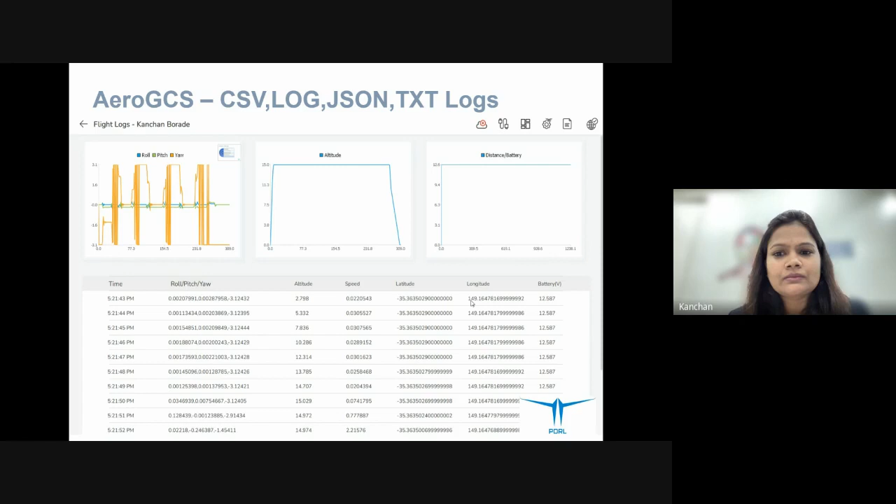Yeah. So, as we have seen, CSV, TXT, .log, and JSON. Those formats are readable formats, and they are very easy to represent in graphical format. Those are very easy to decode. Whereas binary logs must be decoded before they can be analyzed; those are very difficult to analyze as binary. When I say binary, those are in machine readable format.

So firstly, let's understand what binary logs are. The drone's binary logs are often referred to as a black box, or the flight logs, which is a file that records a variety of data related to the drone's flight performance. And again, as I said, those are recorded in machine readable format, that is in zeros and ones.

The content of a drone's binary log can vary depending on the manufacturer, the type of the drone, and the features it offers. However, the typical information that might be found in a binary log includes the flight telemetry, sensor data, remote control data, all kinds of system events and error and warning messages, motor and servo data, GPS communication data, and flight mode transmission data. So all kinds of data are recorded inside the binary file. That's why it is very important to decode it and analyze it.

So this is the option to select the binary file. Let me select any file. So yes, I have selected one binary file related to a spraying mission, which was done with the help of AeroGCS. Here, as I said, you can see the flight modes, that is loiter, guided. All the information will be represented in graphical format on the screen. All the status text messages, errors and warnings will be given.

On the right-hand side, you can see a number of parameters. Whatever you want to analyze, you can select accordingly. Let's see, I want to see how the altitude was. What was the altitude performance in my mission? So I'll just go under the barometer and select the altitude from the barometer. So yes, this is how the altitude performance was. Here the graphical information is represented for the altitude.

Same if I want to compare the altitude of the barometer and the altitude given by the GPS. So yes, you can see the difference. We have differentiated the two graphs using two different colors. So yes, this is the beauty of this log analyzer.

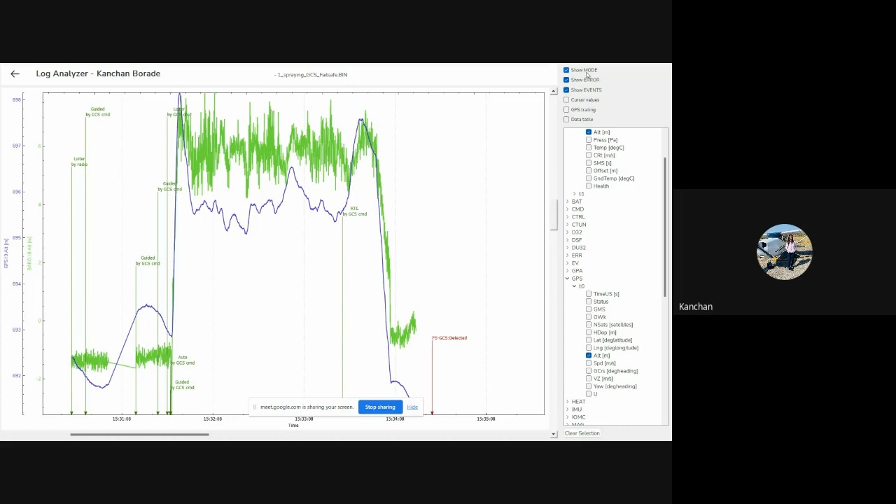Here on the upper side, you can see multiple options. There is an option if you want to see the mode continuously, you can check it or uncheck it. Same for the errors. Then if you want to see the events, all the events that happened at the time of flight, you can see that.

Then the cursor value: if I select the cursor value, I'll be able to see the actual value on the graph, what the value of the barometer and the GPS was at what time. So once I enable the cursor value, I'll be able to see the values on the graph. Then I have a data table. All the parameters are given in the data table. The value of a particular parameter can be seen under this table. We have even provided the table filter.

Once you click on the table filter, you'll be able to see four options, where if you want to deselect all, you just need to click on invert select. Now I just want to see the value of the barometer, what the value of altitude under the barometer was. I'll just accept it, and accordingly those values will get filtered. So this is how the table filter works.

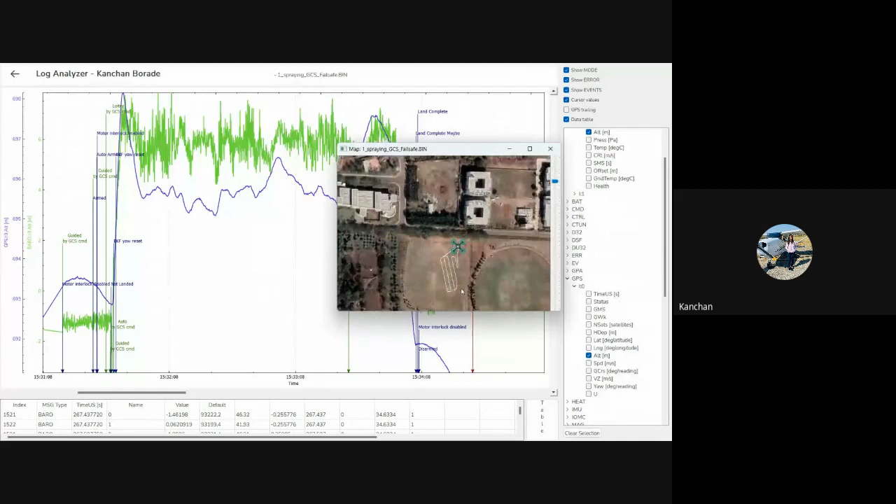I even have GPS tracing, where I'll be able to see what plan was given by the user, how my drone flew on the ground, and what the actual path was. So yes, that can be seen under the GPS tracing.

So this is the basic introduction of this log analyzer. We're going to see a number of case studies, how to use this log analyzer to analyze multiple binary files. I have created 8 different situations. I have 8 different situation binary files where you will be able to see the graph, and I'll tell you how to read those graphs using which parameters.

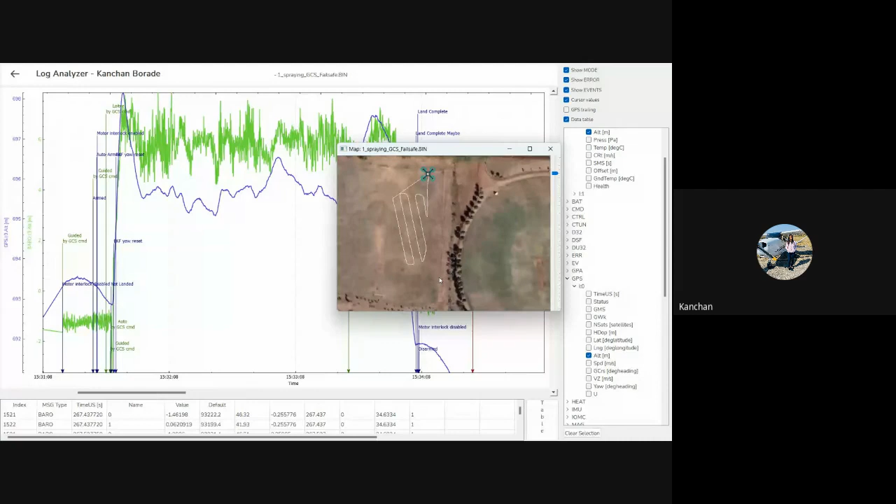Okay, so let's start with case one. I have already selected the file, that is the spraying GCS failsafe binary file for case one. So yes, let's start with that. So this is the spraying mission which we did on the ground. So we just need to see if everything went well or not. So how to see that?

As I told you, as we have seen, we have selected the altitude of the barometer, and we can compare it with the altitude of the GPS. So yes, if you want to check the altitudes, you can select the barometer altitude and at the same time the GPS altitude. You can compare those altitudes. You can even see when the auto command was given, when the actual mission was started.

Now here you can see the value of the altitude. It was 0 initially. When loiter mode was given by the GCS, it was still 0. Now you can see guided mode is given by the GCS, and then auto mode is given by the GCS. Still it was 0. Then it started climbing up, and it was achieving the altitude given by the GCS in the mission plan. And this is how the altitude was achieved, and it followed all the altitude which was given by the mission, or by the GCS.

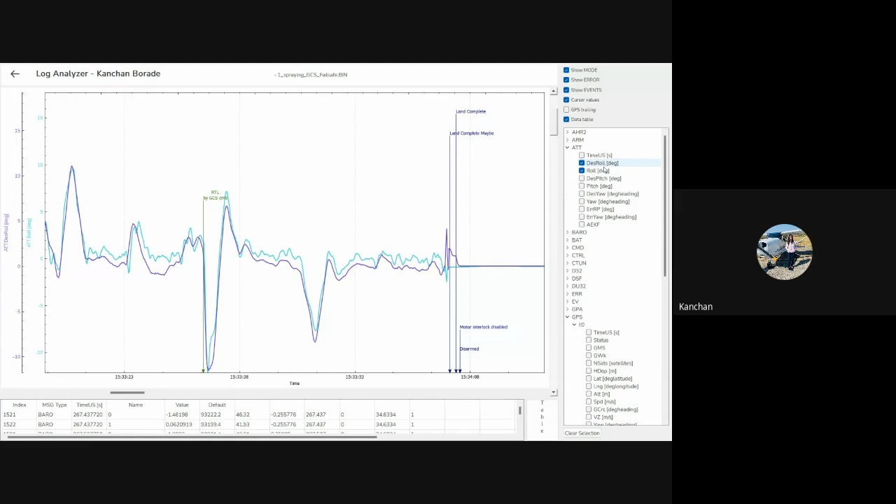But if I want to see the attitude, the actual behavior of the attitude, I'll go to the attitude section. I'll see the roll and what was the desired roll. So again, I can compare the roll which was followed by the drone and what the desired value of the roll should be. So you can select these 2 parameters, desired roll and actual roll, under the attitude section, ATT. Same for the desired pitch and the actual pitch.

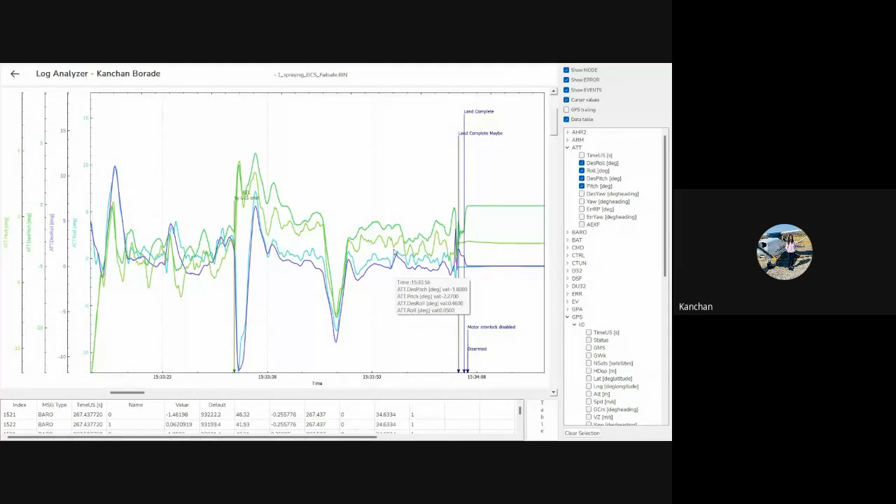As I said, we have differentiated all the parameters with distinct colors. So here you can easily compare the value of the desired roll and desired pitch with the actual pitch. And again, we have the desired yaw and the actual yaw. So we should have this prior information before analyzing the behavior of the drone.

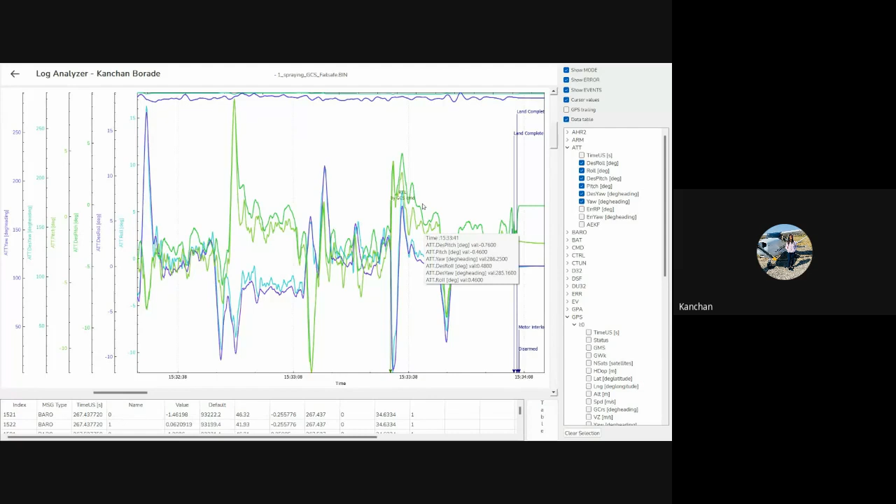So yes, we should know the range of roll, which lies between -90 to 90. Then the value of pitch should be between -180 to +180. And the value of yaw, you must know, should be between 0 to 360. So accordingly, you can read those values. On the y-axis, we have multiple y-axes for the multiple parameters, while the x-axis is constant because on the x-axis we are showing the time. Okay, so accordingly you can analyze the value here.

Now what should be the conclusion? Let's stick to only one parameter, desired roll and actual roll. So here you can see the blue color is showing the desired roll, which is quite a good graph. But you can see the actual roll, which is followed by the drone, is fluctuating. It is fluctuating. But yes, this is acceptable.

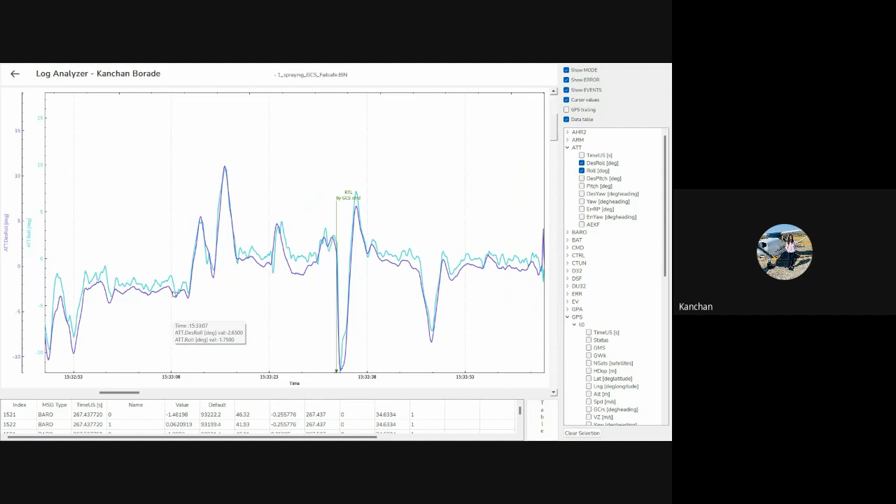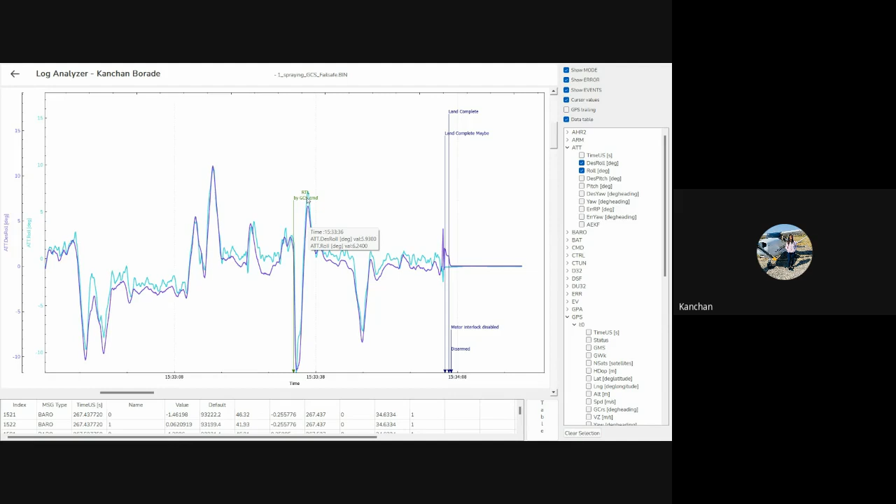So here, if you see the value on the cursor, the desired roll was 5.9, and the actual roll, which was followed by the drone, was 6.2. So yes, this value is acceptable. Okay, so I can conclude, yes, this flight went well for the spraying mission.

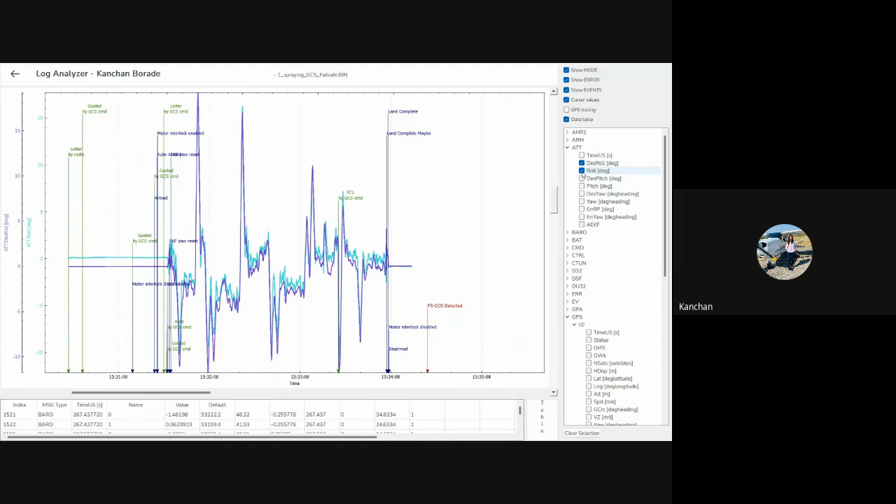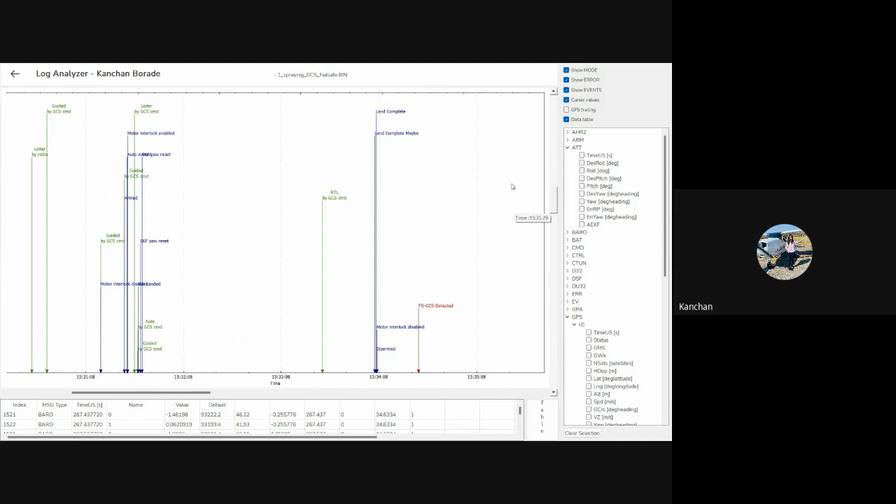Okay, so this was my case number 1. Let's move further for the case 2, where I have a scenario for the motor and the ESC fail. So firstly, I'll select the file which is with me for the motor and the ESC fail. Now, how to analyze it?

Before I conclude, or before I'm saying that this file is motor and ESC fail, many of the users must not be knowing what could be the issue or what could have happened. So before commenting anything, I have just selected the file. Let me tell you the scenario behind this.

So when I say there was no throttle response and it was unable to keep its level, yes, I can go for the motor parameter in this case. So I know which channels were used. That was C11, 12, 13, and 14. So these are the motor performance.

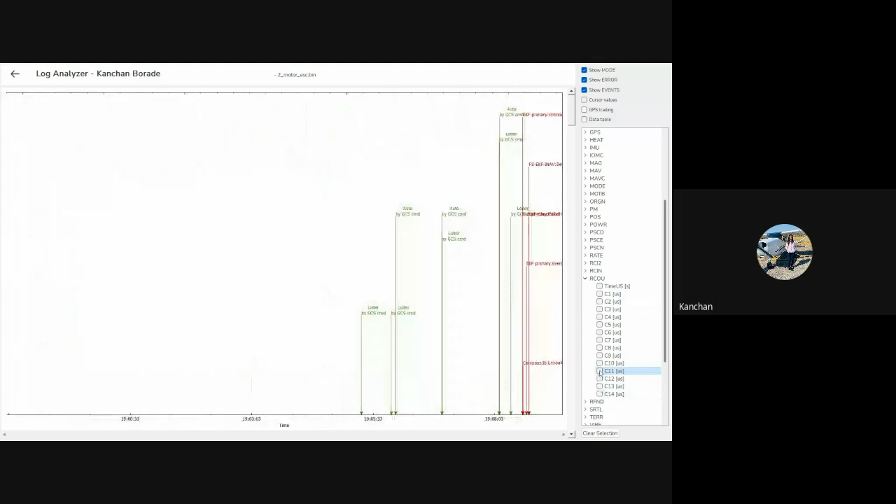So before selecting, as I said, it flew well initially. These are the commands given by the GCS: loiter, loiter, and then auto. It flew well. It was flying in auto mode till this, but suddenly it got some messages like compass was unhealthy at that time. It failed to initialize, and that got fail-safe detected because of the bad variance.

So let's have the motor selection: C11, 12, 13, and 14. Generally, the value of motors or value of PWM which are configured should lie between 1000 to 2000. As there was no message from the flight controller when it was falling, as I said, there was no throttle response. So let's see what was the battery voltage at that time.

So you should go to the battery, BAT, and need to select the battery voltage. So I found this okay. You can see the graph. This is quite good. So I don't think the battery is problematic. There was no EKF variance found.

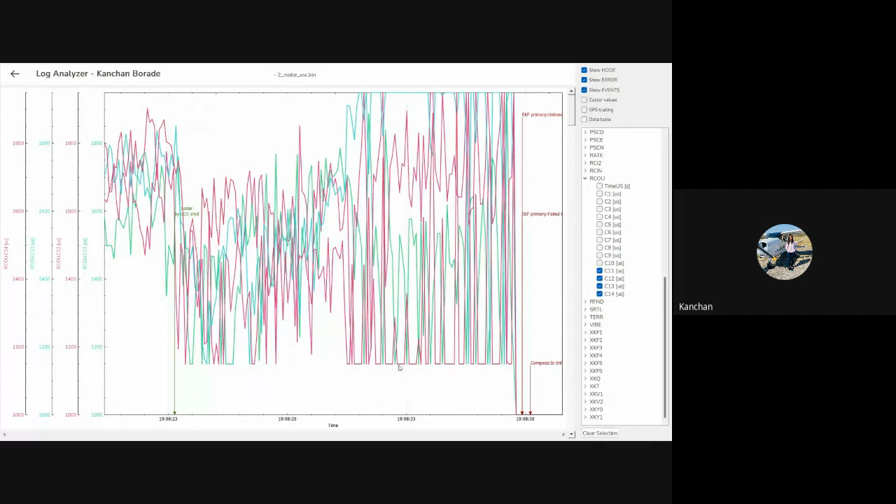13. See here, you can see the values of the motors are touching their minimum value. C12 is going below 1200, so that could be around 1100 or more than that. So they are touching their minimum value. Here you can see those are actually performing well because those values were between almost 1400 to 1800.

So here, as I said, initially the flight went well, but then suddenly it started losing its altitude because these values are touching their minimum value. So that's what we can conclude here: if those values are touching their minimum value, something must have gone wrong with the motors.

As we have discussed the various parameters for this file, let's summarize it one by one. We have checked the vibration values, those were okay. We have checked the battery voltages, that was also okay, because as I said, during the flight the drone caught fire, so it burned. So that wasn't because of high vibration, that wasn't because of the battery voltage.

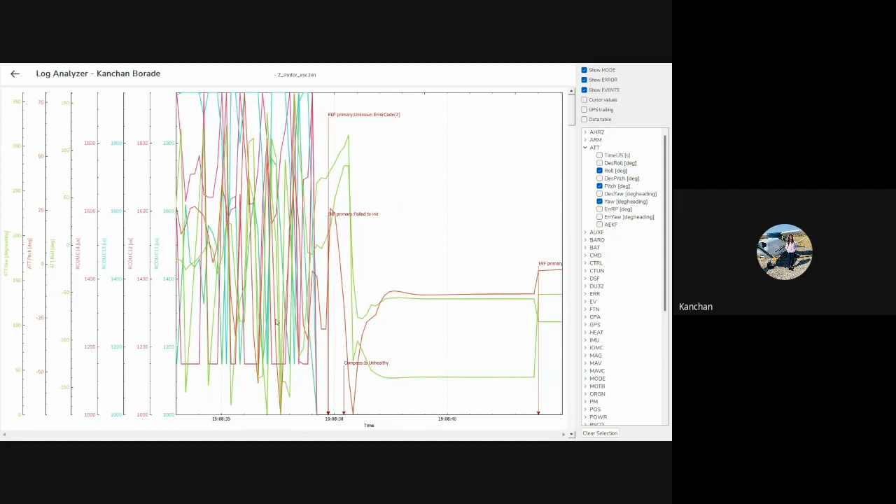So if the user had used the smaller propeller, that drone wouldn't have crashed that time or burned out. Okay. So this is how we can conclude things. We need to check the various parameters before concluding anything. We have seen the various parameters: vibration, altitude, roll, pitch, yaw, then the acceleration, and we concluded there was a problem with the motors.

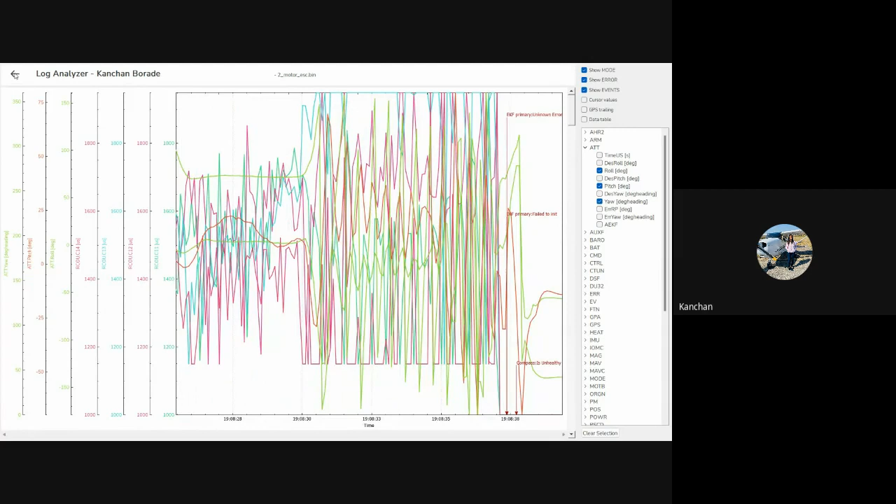So let's move forward to the next case study. Next case is the vibration-related case study. I selected the vibe.bin file. I'll tell you the scenario behind this file as well. This was planned to fly in auto mode. It went well from waypoint number 1 to waypoint number 2. As you can see, auto mode is given, then stabilize, auto, everything went well from 15.9.22 to 15.10.22.

But after that it started to go into an uncontrollable climb. Let's select the value of altitude. You can see everything went well for waypoint 1 and waypoint 2. But after reaching waypoint number 2, it climbed uncontrollably, you can see on the graph here. It went directly from 20 to almost 60.

Then the user tried RTL using the radio, that is RC, but still there was no response. As you can see, after the RTL command there was no response from the drone, and it was still increasing the altitude. Then it switched to stabilize mode. Then it got control, so it was dropping the altitude. You can see the drop of altitude.

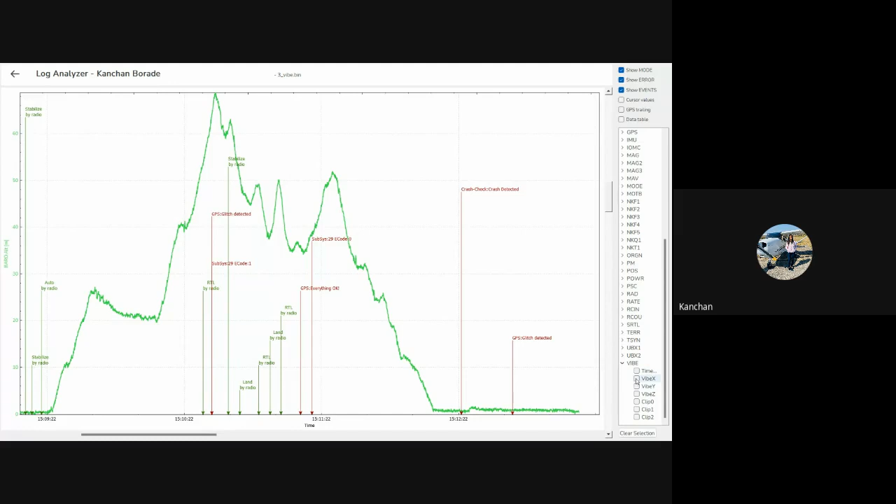As I said, how to check if vibrations are good or not: the vibration Z axis shouldn't touch the vibration X and Y axes. Here you can see there is a mixing of X, Y, Z axes. Those are very bad vibrations, which are not at all acceptable for flights. It is a very common problem for multi-rotor vehicles. It is therefore important to keep an eye on the vibration level and improve the setup if needed.

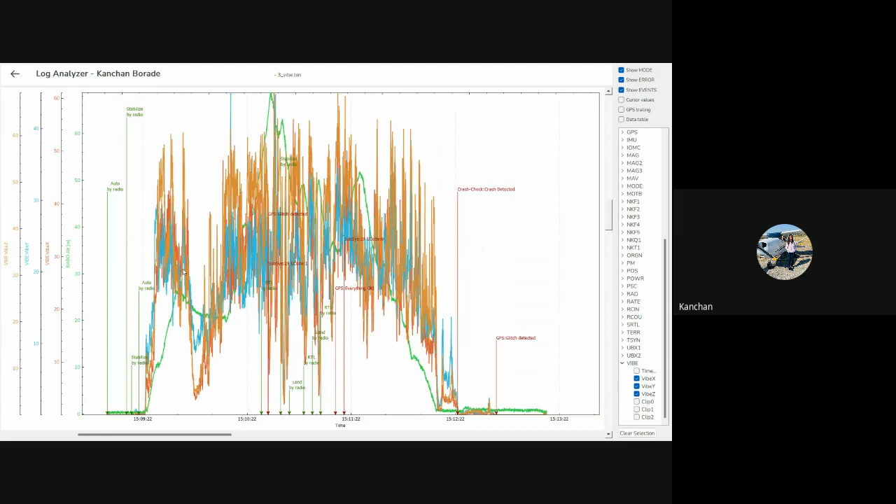Here you can see there was a bad variance detected. That means there must be some failsafe which was triggered, and that was a crash detected. Crash may happen due to various reasons.

So let's select the battery. Firstly, select the altitude value. Here you can see it got dropped to 0. And let's select the battery voltage. Yes, initially it was 10.5 or almost 10.7, then suddenly it got dropped at this point.

You can see it suddenly got dropped, and that resulted in the crash of the drone. It directly dropped on the ground. The failsafe was triggered in this case, but before landing, it crashed as the battery voltage suddenly dropped. You can see here. So what should be the prior actions taken?

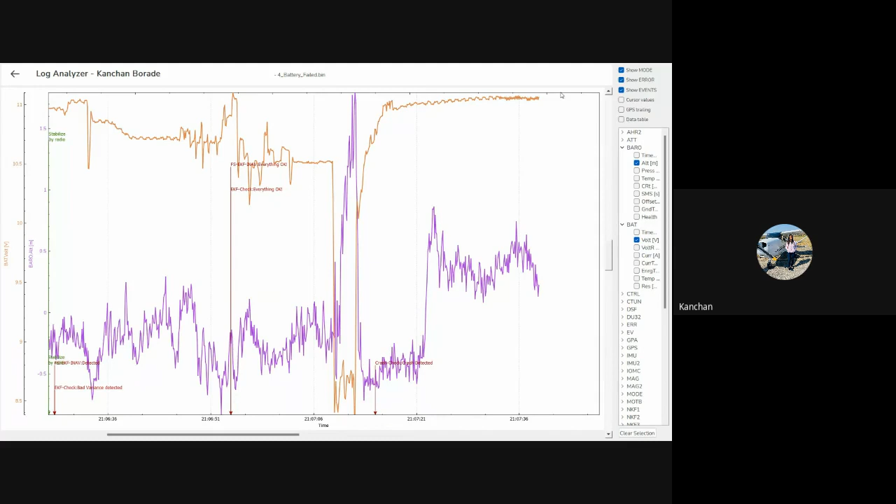User should check the current sensor as well. The sensor which is connected to your battery, that is the current sensor. So yes, that also should be taken into consideration. So by monitoring the battery voltage, you can check the battery statistics. Next, move to the fifth case study, GPS glitch.

Yeah, so before going for the GPS glitch, Vishaka, we have one video. Can we show that video? Yes, sure.

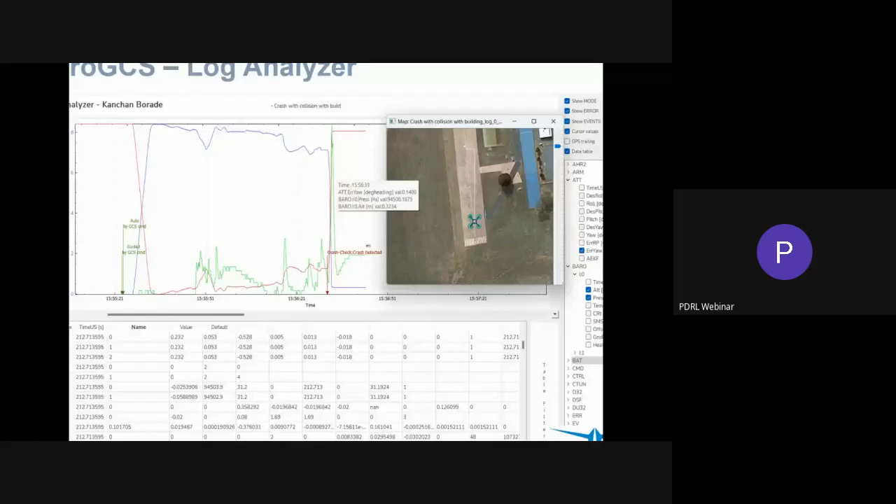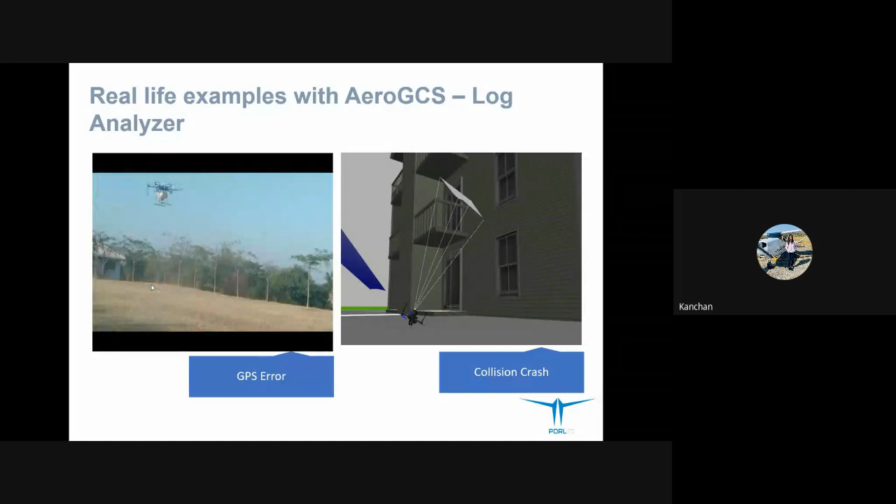So this was a spraying drone flying on the field, and it was not able to maintain its position due to GPS. There were fewer satellites at that time while taking the flight, so it was unable to maintain its position, and suddenly it got a GPS glitch and it hit the tree. You can see in the video.

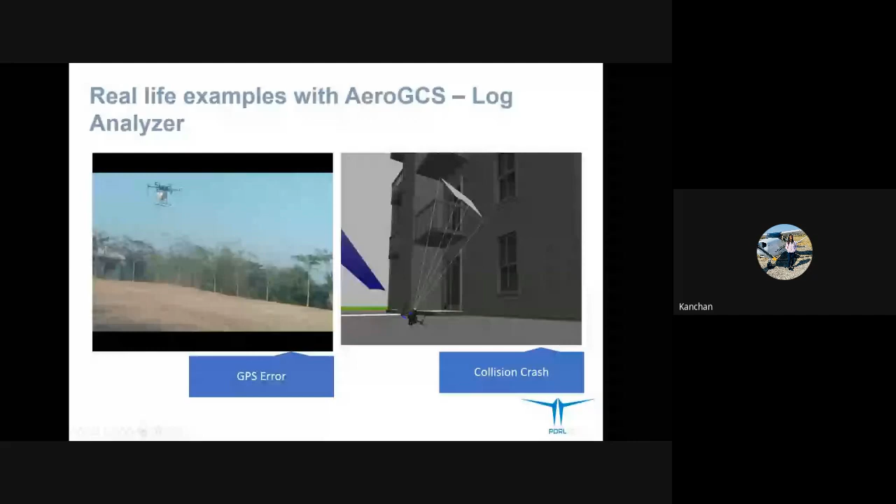Yes, and it crashed and resulted in one of the arms being broken. So why could this have happened? So again, before taking the flight, you need to monitor the number of satellites present on the field. The minimum number of satellites required for successful mission flights is greater than 10. A number of satellites greater than 10 is acceptable for the mission.

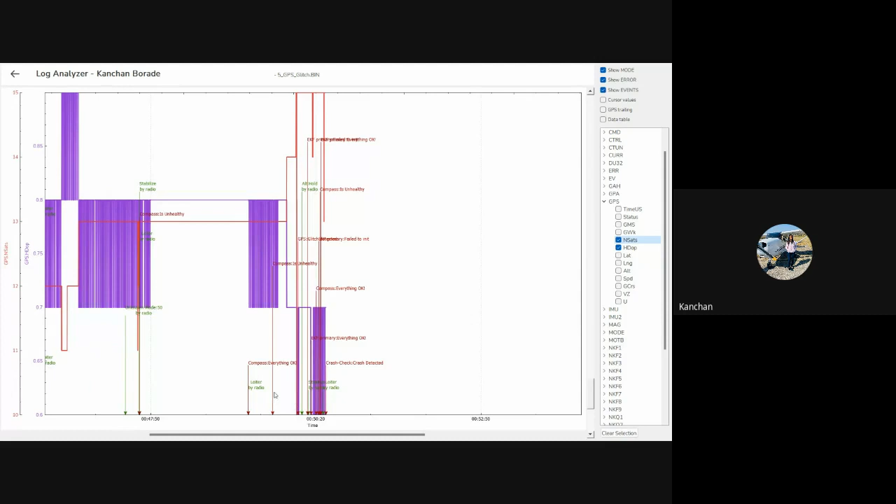And the good value of HDOP lies between 1 and 2. So here you can see initially, in the auto and the stabilize mode, everything was going good. Then suddenly the GPS glitch was detected and it hit the tree. Here you can see the glitch was detected. Here you can see the value of HDOP.

You can monitor the value of HDOP here. It was 0.6 only. So when that glitch happened, the value of HDOP was very poor. So before taking any flight, you'll have to monitor the number of satellites and the value of HDOP. Okay.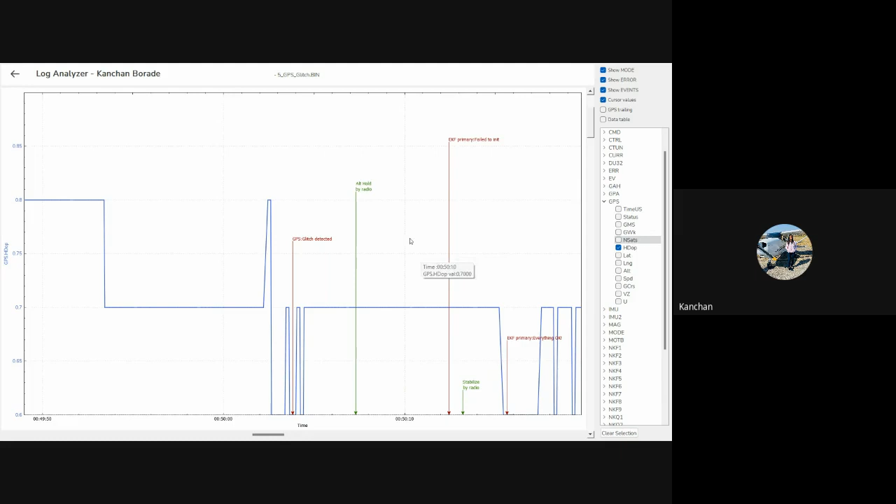Yes. Next case is for compass. I'll tell you the scenario. We had this binary file. It was a hexacopter spraying drone. Initially, the flight went well, but for the longer flight, it got the message: large change in the magnetic field, 49%. So the message itself explains that the error is related to the compass, also magnetic field interference.

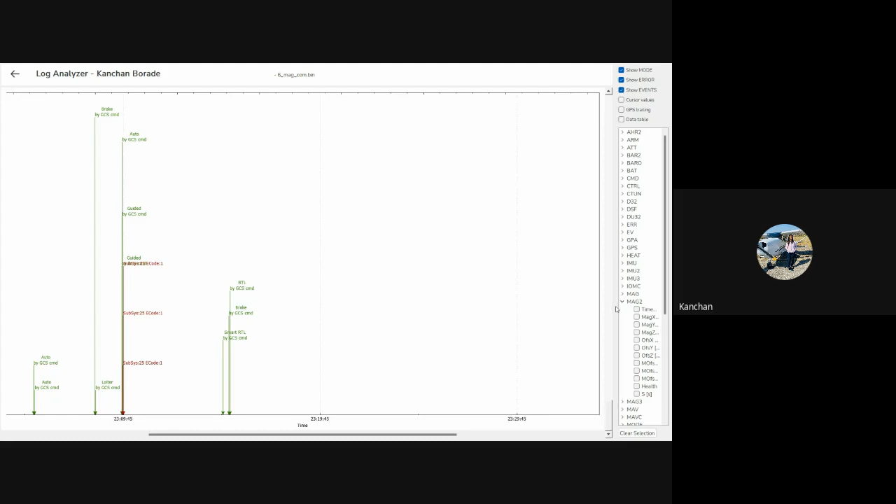So we'll select the parameter accordingly. As we know, multiple types of compass can be connected on the drone. One is the internal compass and others are the external compasses. Those external compasses are labeled as 2, 3 onwards, and internal maybe 0 and 1. So let's select mag 2. We'll see what was the value of the external compasses: mag X, mag Y, and mag Z.

You can see here, before selecting mag Z, the value of mag X and mag Y, that is the magnetic axis X and Y. Those are well, but when I select Z, I'm just changing the color of the Z axis. You can see the behavior of the Z axis here. It was completely changed. You can see this is highly affected by the current drawn.

And this is nothing but due to the interference. Okay, so it is always recommended to perform the compass and the motor calibration before taking the flight, that too with all the setup.

If you're flying the hexacopter, I would suggest the motor, the compass, the ESC, all kinds of calibration should be done with all the setup. You shouldn't directly remove the FC and perform all the calibration on the FC, which is not at all recommended. So you may face this kind of issue if you don't do the calibration with the whole setup. So yes, you should do all the calibrations with the complete setup.

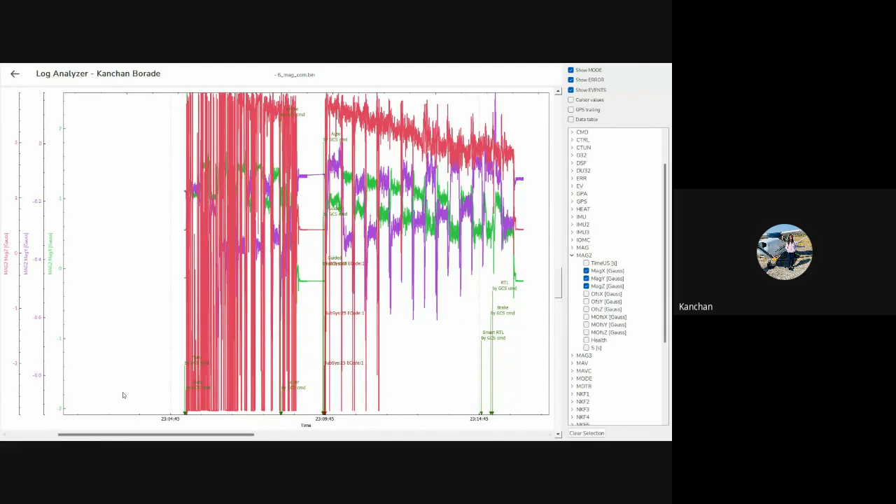Okay, next we move to the seventh case study. Again, it is related to compass only, but I'll tell you why this happened. I'll tell you the scenario. The user made a new version of his drone. He changed his GPS from Here 2 to Here 3, and after tuning and some of the calibration, he started flying the drone in loiter mode. The drone began to move in a big circle, the user tried to land the drone, but it started moving fast. And when the user stopped the motor, unfortunately, the drone landed with damaged landing parts.

So what the user has done, he just changed the GPS from Here 2 to Here 3. Firstly, if you are building the new version of your drone, it should be tuned, it should be calibrated properly. The placement of all the components should be done with the standard mechanisms. Let's have a brief analysis of this.

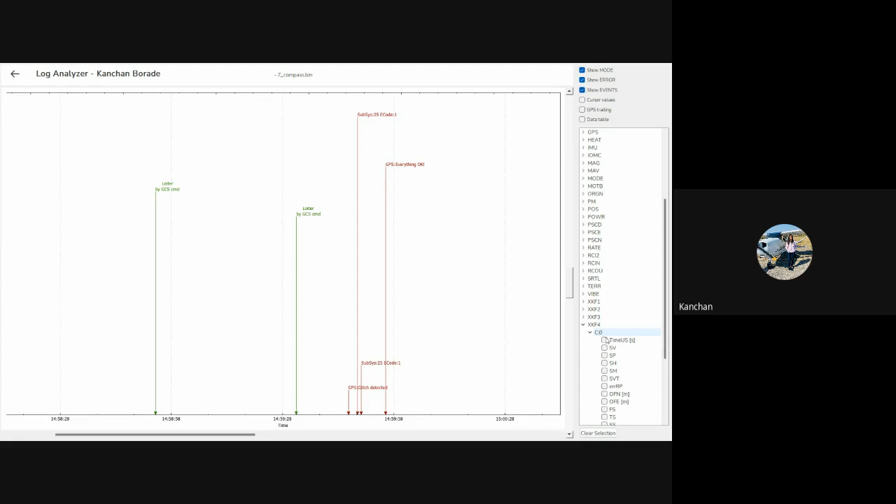So let's select XKF4. We'll need to check all the GPS, as it is related to GPS. That's why I'm selecting XKF4. XKF is the extended Kalman filter. So I'm going to see what was the GPS velocity, the GPS position, the barometer test ratio, and the magnetometer test ratio. So I'm going to select SV, which stands for GPS velocity test ratio. Then SP, which stands for GPS position test ratio. SH is related to barometer test ratio, and SM is related to magnetometer test ratio.

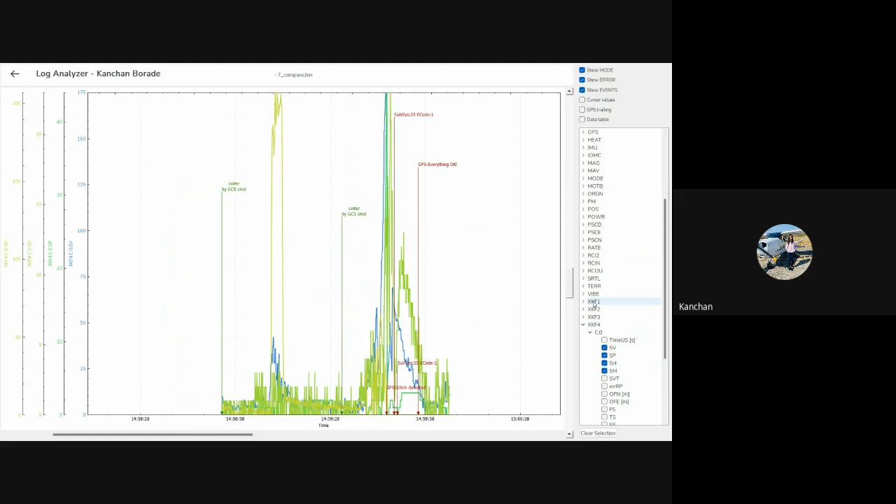And again, we're going to check the IMU. I need to see what was the acceleration at that time, acceleration X and Y. There is some problem with the GPS; there is a GPS glitch, as we can see on the graph. It could be caused by electromagnetic interference also, because while mounting the Here 3, it could have been kept closer to the drone body, that is the FC, and if the FC internal compass is enabled, that could have caused the electromagnetic interference.

You can select the HDOP value as well. Here you can see the HDOP value is very low. You can see these are the accelerations. XKF4, as I said, XKF is the extended Kalman filter, and SV is related to GPS velocity. It directly increased to its highest value.

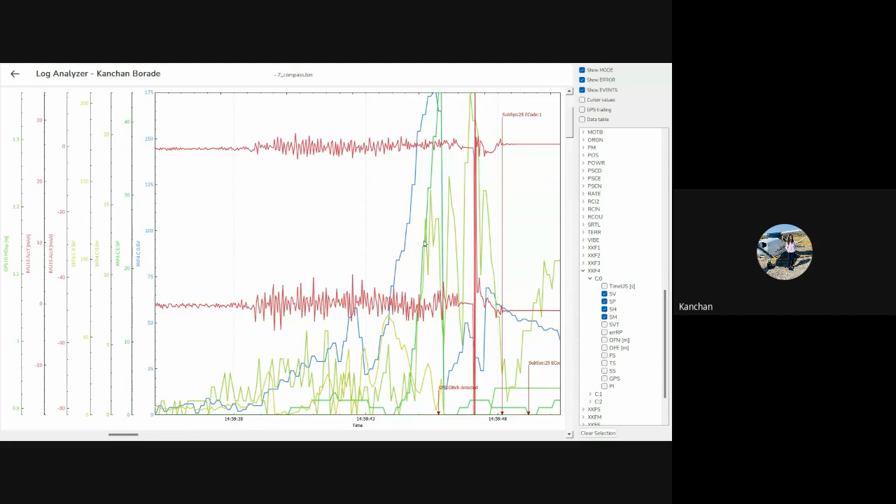Then you can see here the magnetometer ratio. It again hit its highest value, and the position value as well. So this is completely related to compass. Magnetic interference happened between the GPS and the compass. So this is how you can analyze the magnetic interference due to the compass. Okay.

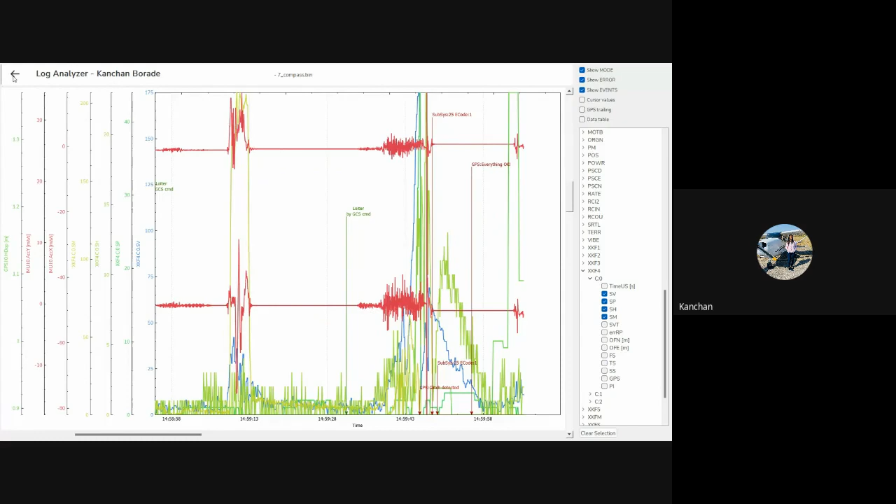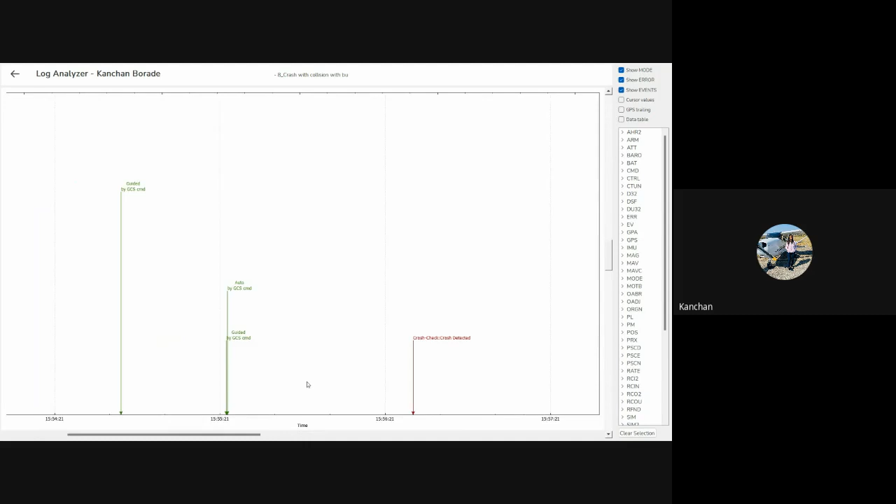Next file is, yeah. This file has been generated by us on the simulator only, because we wanted to monitor the value of the rangefinder mounted on the drone. The scenario is the drone hit the building because the response time was very high for the obstacle avoidance. We connected to the drone.

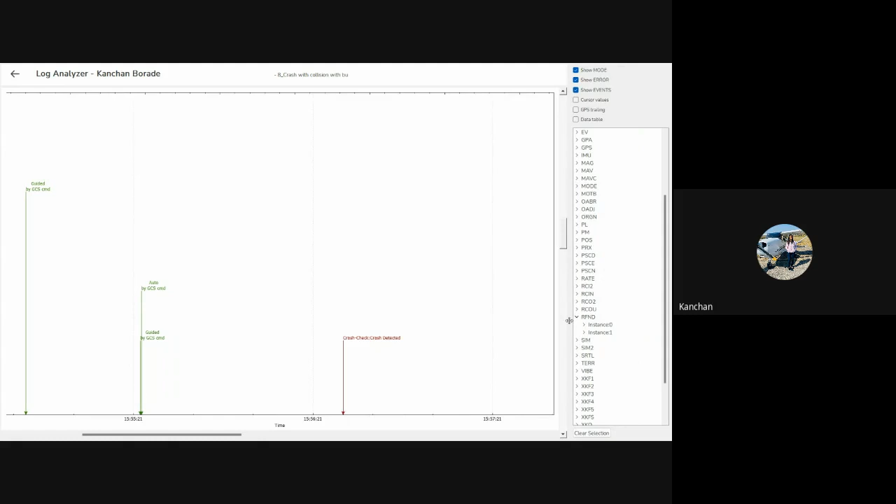As we know, the accel max avoidance, that is maximum acceleration, should be greater than the speed of the drone. And the speed of the drone, as we know, is WP nav acceleration. Otherwise, the sensor will fail to identify the obstacles and it results in a collision. So we will go for selecting RFND, that is the rangefinder value. You can check the distance; as it crashed, it hit its maximum value.

So before flying, the position of the obstacle avoidance sensor which you have mounted on the drone matters a lot. You should check the response time of the sensors as well. At the time of flying, the maximum acceleration value should be greater than the drone speed. If drone speed is greater than the avoidance maximum acceleration, then yes, it will result in a collision.

Okay, so this is how you can monitor the values of sensors as well using the log analyzer given in AeroGCS KEA. You can monitor the altitude as well. It got hit, it crashed, and it touched the ground.

Okay, so yes, that's it from my side. This log analyzer tool will be available in a week for you all. Remember, it's not just about analyzing the data, it's about leveraging that knowledge to elevate your drone operation to new heights. So let's work together to ensure safer flights, better performance, and smarter decision making.

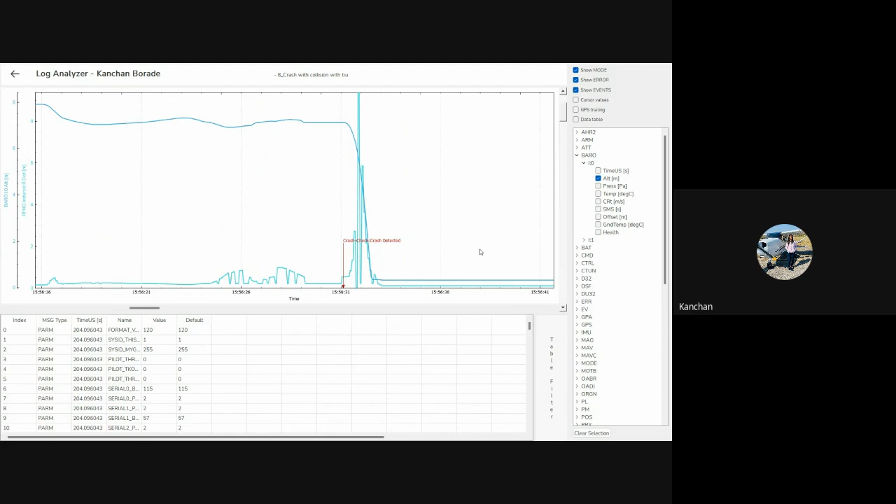Here, I request the audience, if anyone has a binary file which they want to analyze, you can share it with us. We'll try to analyze it. And yes, we are open for discussions. Vishaka, over to you. Thank you.